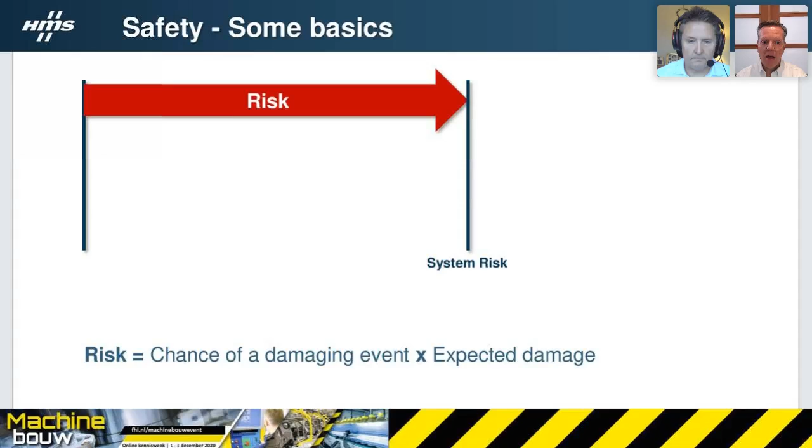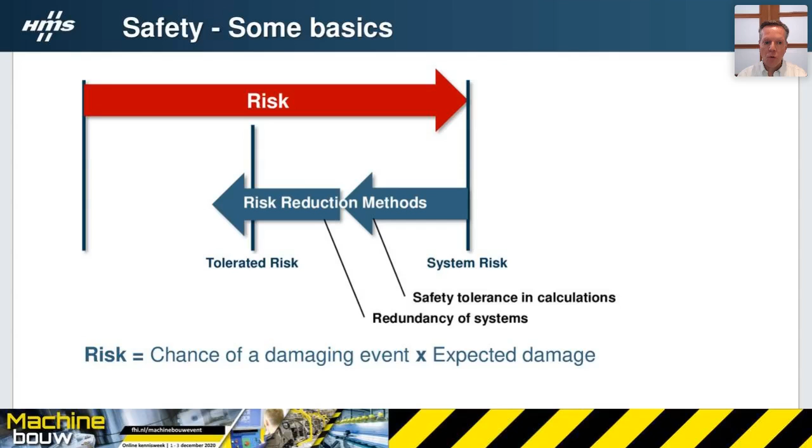Every system has from nature a certain system risk. And with help of reduction methods like safety tolerance or redundancy, we reduce the system risk below a certain tolerated risk. That means that the remaining risk will be in a normally safe area where a system is working normally.

At the moment this remaining risk tends towards the tolerated risk, we detect it, and with help of a safe state zone, we try to bring a system into a safe state. But please note, whatever we try to do, there's always the possibility that the risk of a system increases over the tolerated risk, entering into the danger zone. Safety management is all about reducing the chance a system is coming into this danger situation.

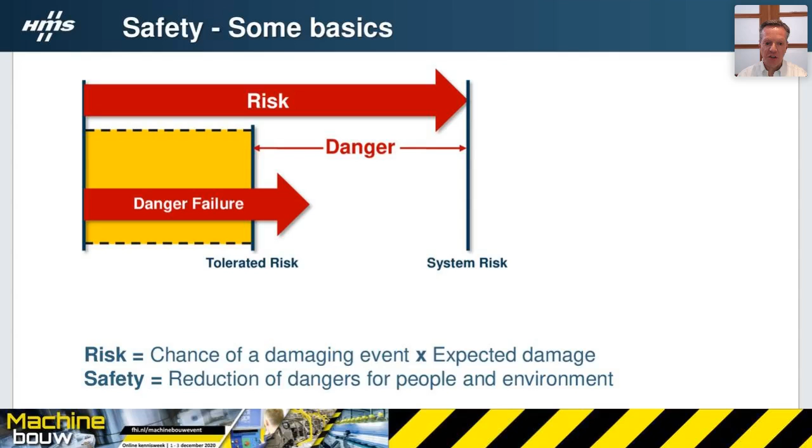Therefore, we have defined several levels of danger situation, starting with a level where, if it would happen, we would have minor injuries, up till SIL level 3 or performance level E, where you could have major or even death-threatening injuries. Although the possible failure is indicated in some small figure per hour, you could say that on the highest level, we accept approximately 1 failure every 1100 years.

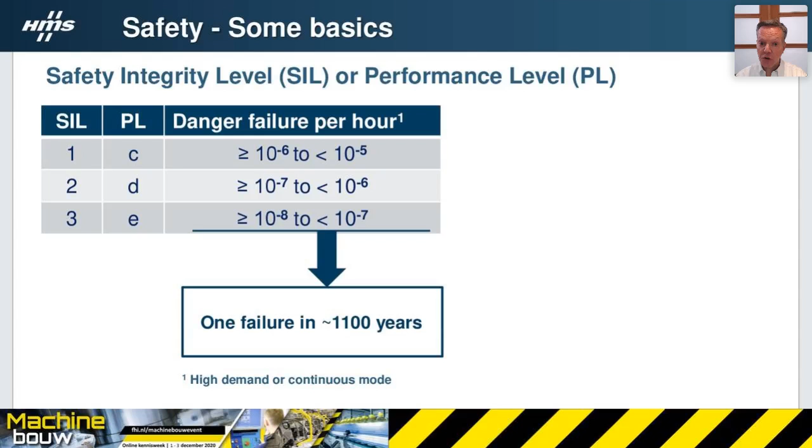But besides defining such a level, it's of course also important to assign it. How do our customers know that we have set up a system which fulfills those rules? Depending on the level, the assessment is different. We start with an independent person, but on the highest level, you have to use an independent organization, and that's where organizations like the TÜV, IFA, and others play an important role. For the rest of this presentation, we will focus on the highest level, SIL 3 or PLE.

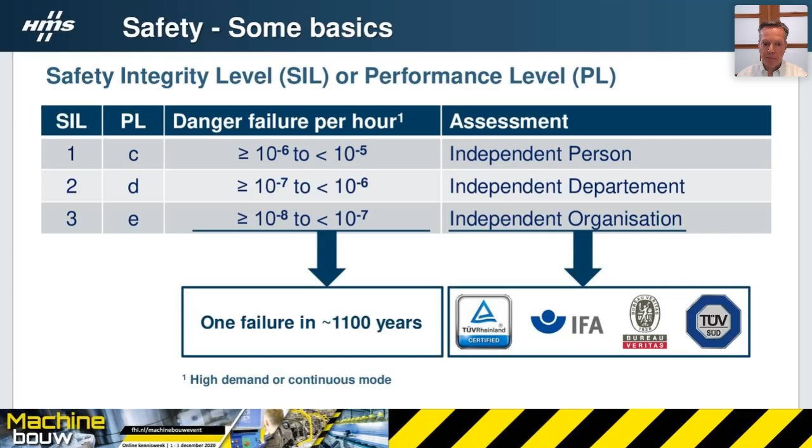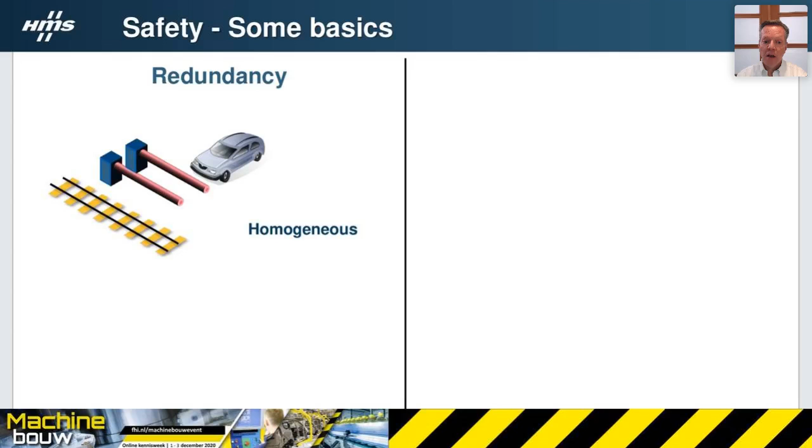I already indicated that we try to reduce risks by introducing redundancy, and in general there are two different ways to do it. The first one is the homogeneous one, where you simply use the same solution twice. You could also use a diverse solution, where you have several systems more or less doing the same approach.

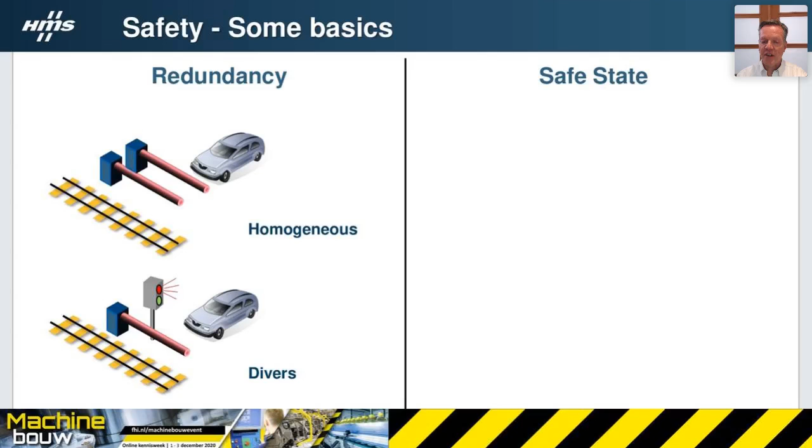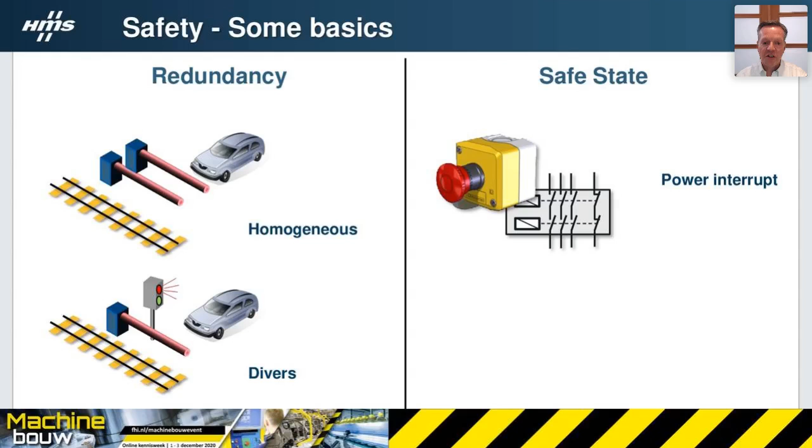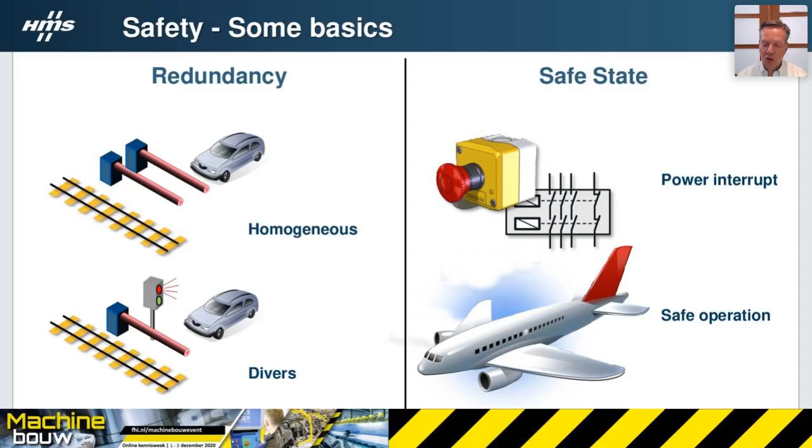I also indicated that we try to bring a system into a safe state when it tends towards the tolerated risk, and the most commonly used solution is simply switching off the power of a system. Of course, there are systems where it's not so handy to switch off power, and in that case we will bring a system into a safe operation. For the rest of the presentation, we will focus on homogeneous redundancy in combination with a power interrupt, because that's the commonly used solution within the industry.

I hand over to Stuart for an introduction of safety communication.

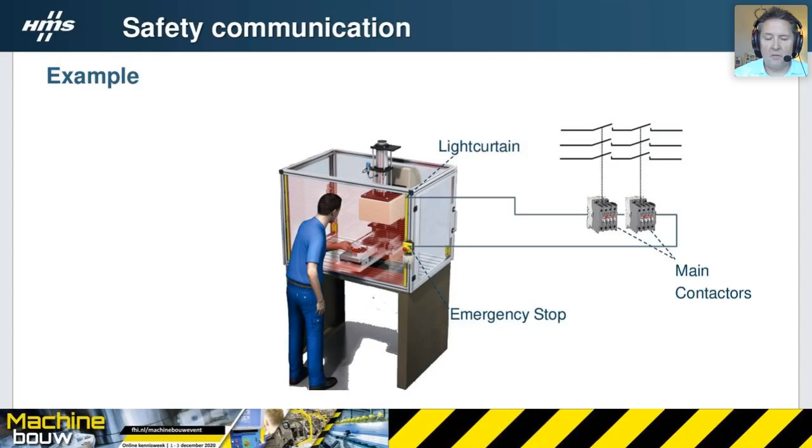The safety stacks will talk to each other through what we call the black channel. And should there be any issue with the communications, the machine will fail into a safe state. And this is the key thing here. What we're trying to achieve is safe communications via a non-safe network. It's not a case of guaranteeing always on communications. It just means that if anything goes wrong, you will be in a safe state.

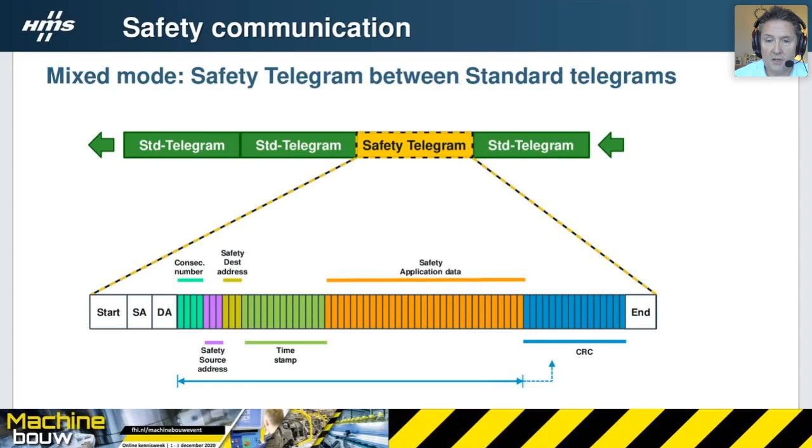We have what we call the consecutive number. Each message is given a number. It is a sequential number. It's not an infinite number, so they will loop eventually, but it's enough to ensure that the system knows that the messages are coming through sequentially and what order it should be processing them in. We have the safety source address and the safety destination address to make sure that only the correct nodes are communicating. We have a timestamp, and then we have the encrypted safety application data, which could be just something as simple as stop. And of course, we have a CRC check.

Okay, so I'm going to pass back to Kurt to talk about embedded design-in. Thank you, Stuart.

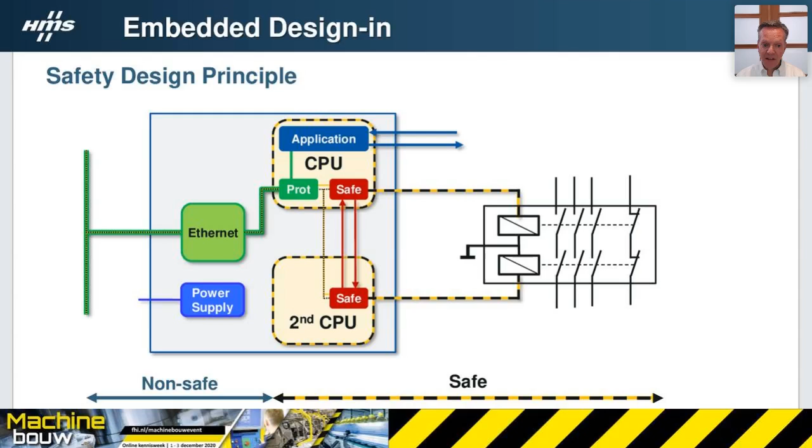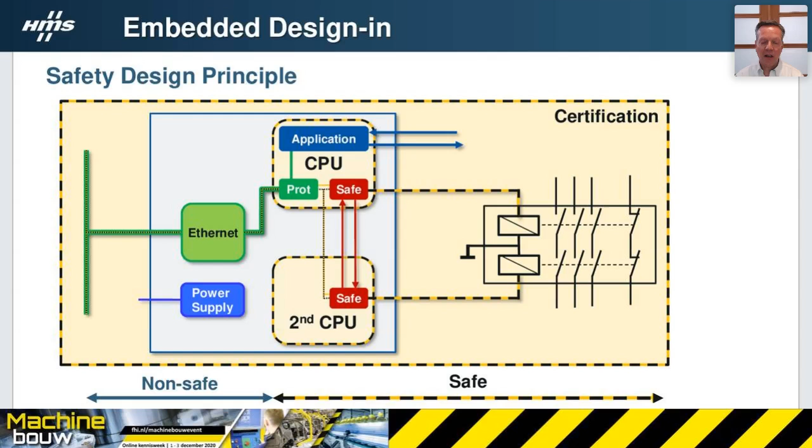Please note that what Stuart already indicated, that you have safe communication over a non-safe network, you see back in this design as well. The first part is non-safe, but the second part, where the stacks are taking over, is the safe part of the application. But if you want to certify this as a safety application, I'll come back to that in detail later, then you have to certify it as a complete system.

We already discussed a couple of times using a software stack. But a software stack is not a simple application part of software that you buy in and add to your application, and that's it. It's rather a very complex, in-detail software where you really have to understand how an application is working and which phases and technologies such an application all contain.

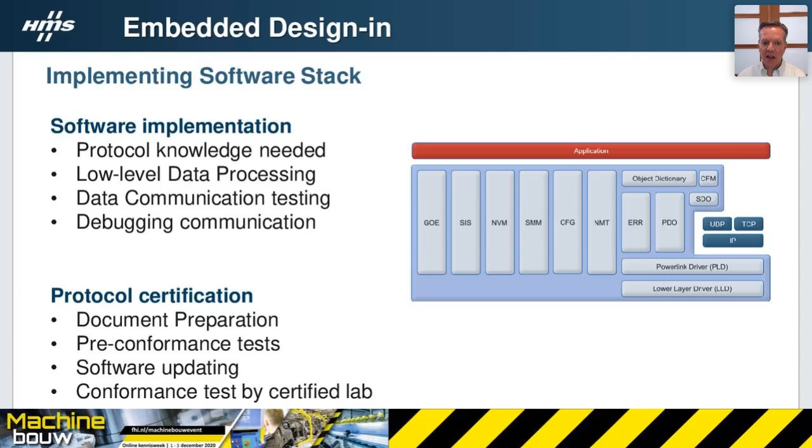At the moment you have set up a protocol and it's working, you have to do the complete certification. That means you have to set up document preparations, you have to do pre-conformance tests simply to find out if everything is working okay. Then you have to bring everything to the latest software state, and you can send it to a certification lab to get it certified.

The bad part of it is that you, in general, have to support more than only one stack. First of all, not all protocols are dominant in all parts of the world. In Europe, for example, PROFINET and EtherCAT are the most popular protocols. But in America, EtherNet/IP is popular. And when you would like to ship your product to Japan, then CC-Link IE from Mitsubishi Electric is popular. That means that you have to implement several stacks for several solutions.

And besides the stack itself, you also have to combine it and integrate it into your target hardware and into your target software. And besides the protocol, you also have to add the additional protocol stacks to support your safety. And if your application has to support Industry 4.0, you have to add those special protocol stacks as well. And to finalize it, if your product management is requesting web browsing functionality, emailing, or whatever, you have to add all those stacks to your total system as well.

I already indicated a little bit about protocol certification. And the protocol certification is a straightforward process. You predefine it, you do your pre-test, you send it to a lab, and you get it back with the stamp that it's tested. Down the line, it's a completely technology-driven approach.

But if you want to certify your safety application, that's much more difficult, because what you actually ask a third party like the TÜV is: would you please make clear to our customers that this system is really safe? And that means that the TÜV really wants to know that it's safe. And that's more than only technology. They want to directly see not only what the quality of your design is, but what the quality of your organization is. How do you process it? How do you document changes?

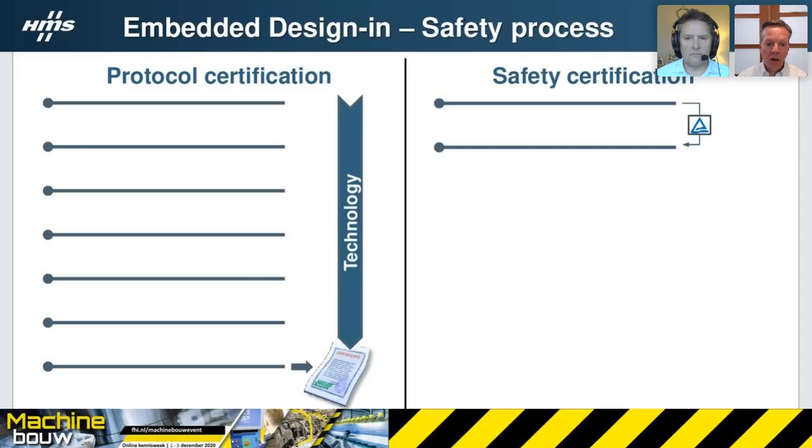Who is responsible for the setup? Who is responsible for taking care of the quality? All those items come back at step. And every change you would make on the design would mean that you have to start the complete safety certification from the beginning on.

That means that a safety certification is a very complex task, and it is not technology driven, but much more process, quality, and organization driven. And that you see back in the development time. A simple protocol certification of a device running Profinet, for example, will cost you approximately 3 months. A safety certification will cost you at least 1.5 to 2 years.

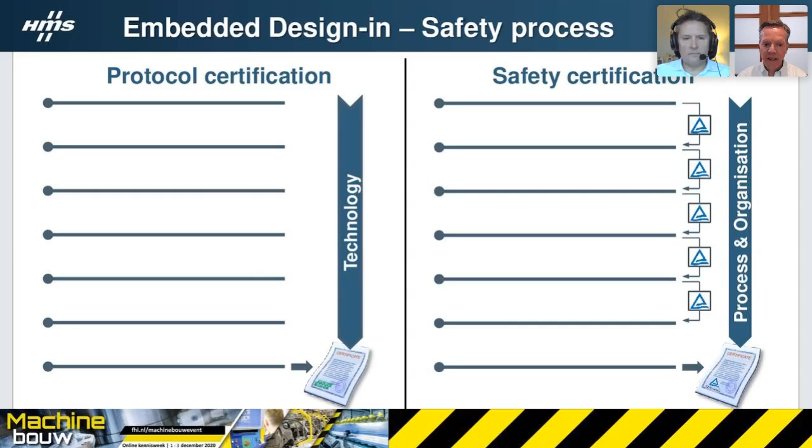To overcome those issues, Stuart will take over to present to you a much more modular design. Thanks, Kurt. Okay, let's have a look at the options against stacks where we use a modular design and what are the benefits. So here we have an application. It's a motor control application in this case. This is our target application. So we want to add safety functionality to this without using stacks.

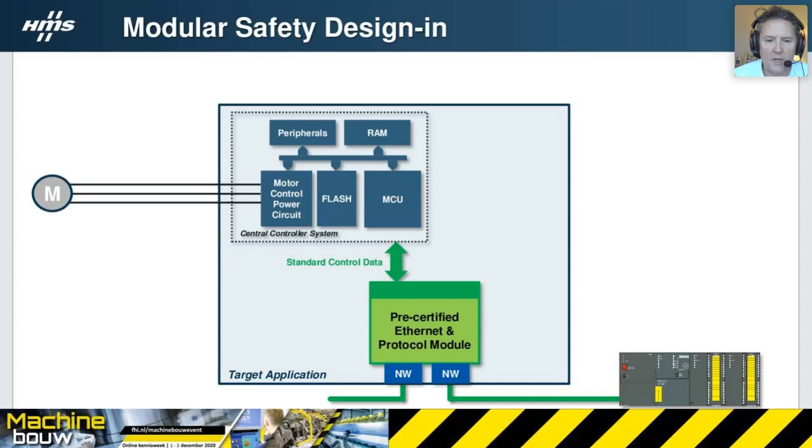Firstly, we use a pre-certified Ethernet module or communications module. That's going to handle the general communications, all of the standard protocols you're looking at there, including the Ethernet and the IIoT protocols. Next, we can add a pre-certified safety module, and I will be repeating pre-certified because that's key to this. We could also add a pre-certified power supply module. The safety module will be handling the safety protocol stacks, whilst the standard module handles the communication protocols.

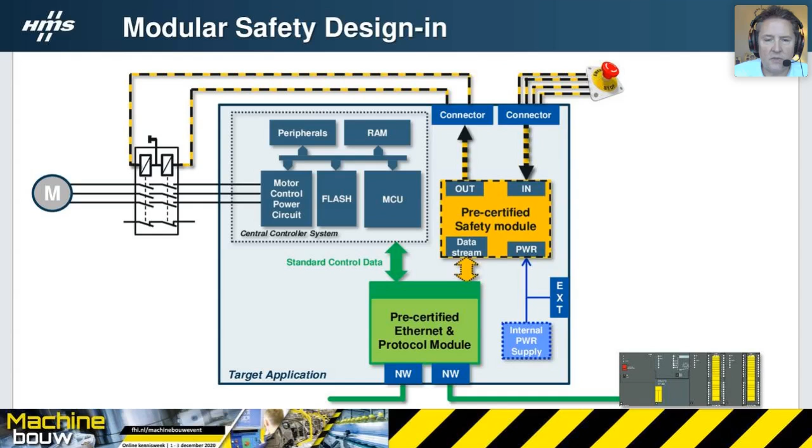We can then add pre-certified input and output devices. So for example, we have this input switch, emergency stop, going into the safety module. And then from the safety module, we're communicating with the safety relay. Key thing to note here is that all the safety communications happen outside of your core application. So the central controller, this motor controller, doesn't see and isn't affected by the safety communications unless a safety situation occurs, in which case the safety module via the safety relay would break the power.

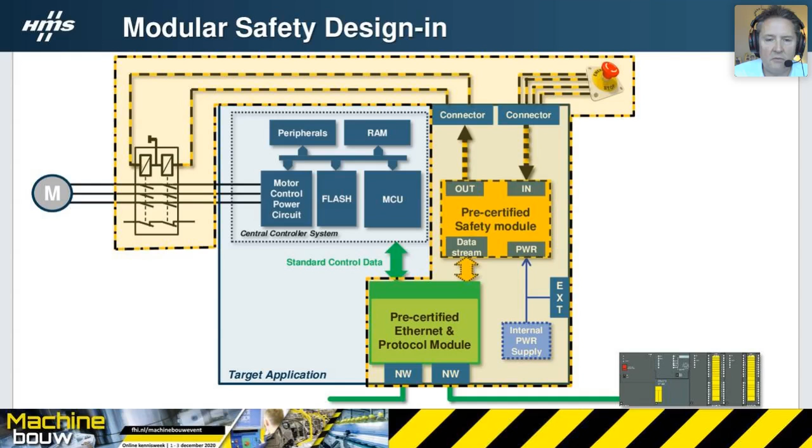Key thing here is that as well as the communications, the physical safety modules are all outside of the core application. So in the yellow area here, all of these modules are pre-certified, which is going to save a lot of time and money, because that's the part that you will certify rather than having to be involved in changing your own core application, such as a central controller system.

So let's have a look at a customer case. This is a client of HMS's called Fortress Interlocks, very well known throughout Europe. Fortress, as they say, are world-leading safety interlock manufacturers. And a few years ago, they realized that they needed to find a solution for safety communications too. So they started down the path of looking at developing their own solution. In this case, they started working with HMS on our module, which is called a T100 safety board. But the same argument applies for any safety boards.

So this saved them time and money by using a pre-certified safety board. They only then had to worry about how they interfaced with it through their application. As it happens, this was very early on in the development of the HMS safety board, so we helped Fortress with a lot more of their design than they'd expected to, and it's a service we offer for our clients, that we will work with them so they're not alone trying to integrate this solution.

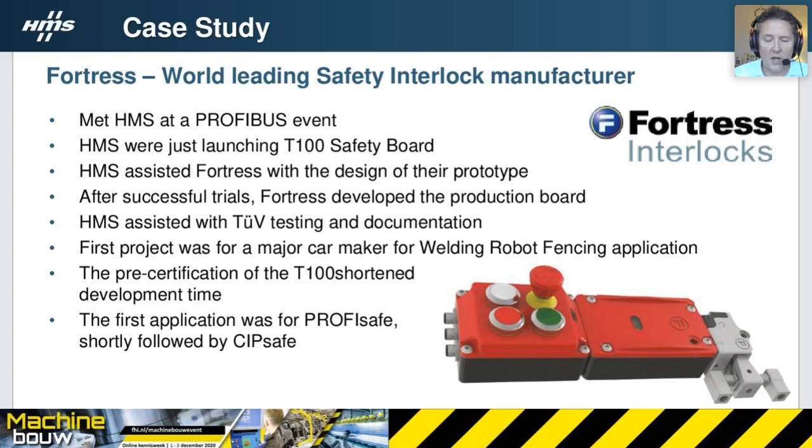So we were involved in the TÜV testing and documentation, but at the end of the day, the pre-certification of the system really shortened the development time for them, because they could then just concentrate on certifying the complete solution and not having to worry about the safety module aspects of it. So I'm going to pass back to Kurt. Kurt's going to look now a little bit more into implementation of that kind of solution. Thanks, Stuart.

To show you an implementation, I would like to introduce two components we have available for that. That's first of all the IXXAT Safety T100 module, which is a pre-certified safety module with IOs for one safety relay and for one emergency button. And in this case, it's running PROFIsafe.

It contains two-layer credit card size boards. The lower layer contains the dual microcontroller solution with the stacks, and the top layer contains the safety I/O towards the emergency button and safety relay.

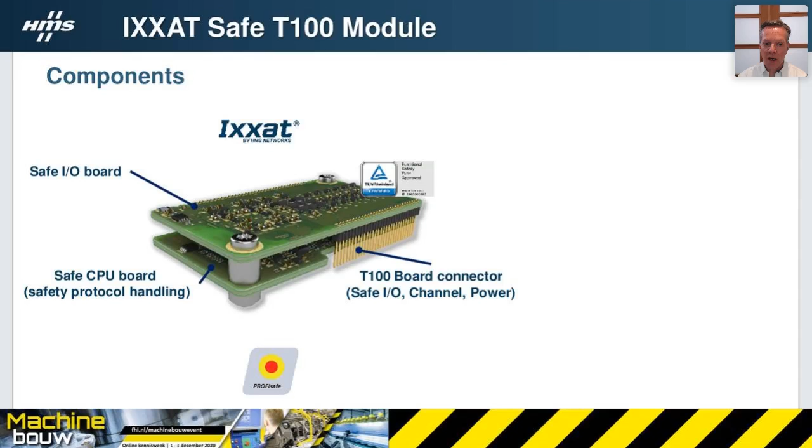It's connected to our Anybus CompactCom solution, a complete ready to use board to support real-time Ethernet, in this case Profinet.

The Anybus module will support Profinet for your application and exchange information with your application over the Profinet network, and passes all safety messages over the black channel towards the IXXAT Safe T100 to process it.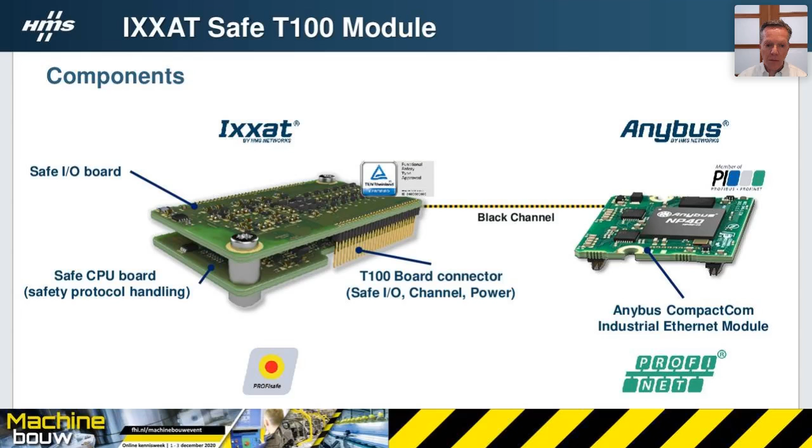To design in, the IXXAT Safe T100 is already pre-certified, but comes with a complete safety manual you have to follow to fulfill the demands of the safety organization. With help of the manual, you can implement it into your design, and that's important - you can write on top the complete product safety manual needed as the safety documentation of your implementation.

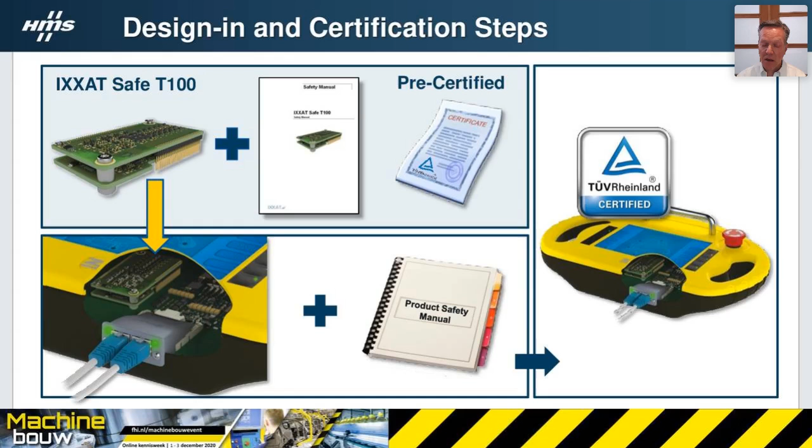And when you have done that, you can get rather quickly a certification by TÜV, reducing the amount of time and investment needed quite drastically.

To wrap up, we are using pre-certified communication modules. They come as common hardware and software design-in, which are completely focused on safety I/O, and they work together with all well-known safety PLCs.

With help of those components, you can set up a rapid development. You get a proof design-in concept before starting. You can do your functional and technical development, set up your product safety manual, and do your validation, and finally get in a limited amount of time and resources a complete product safety approval.